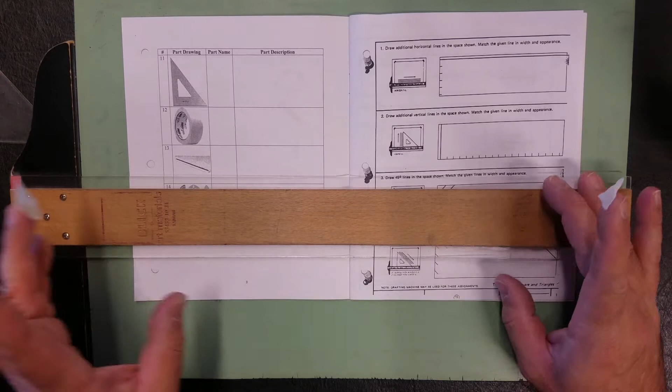Next thing I'm going to do is take my T-square, set it on top of my paper, and use one of these lines right here as my reference. It doesn't matter if you use the top or the bottom of your T-square - the only thing that matters is that you've got your edge nice and tight.

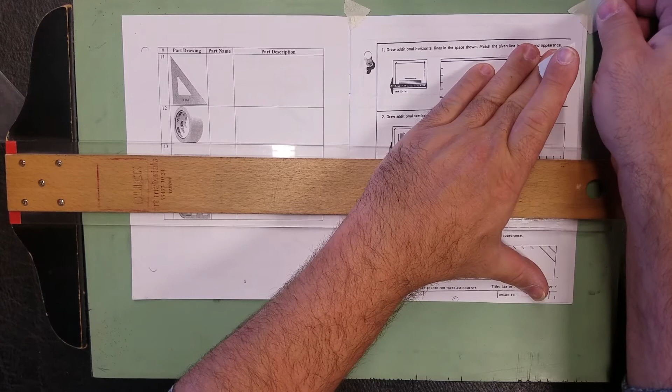Once you have it, go ahead and put a piece of tape right here in the corner. I'm going to put another piece in the corner. Push my paper over and down, and over and down.

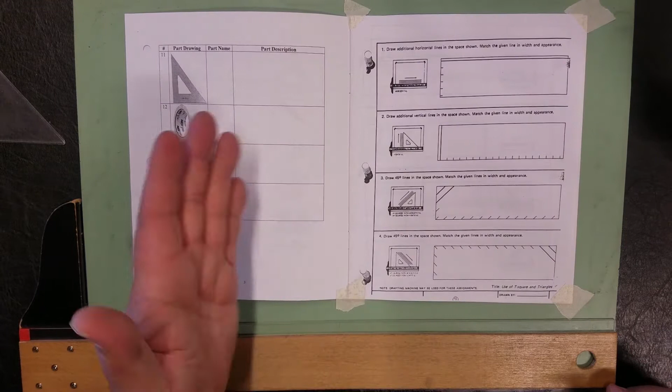Now, if you had a paper where you needed to draw on both sides, don't trust that this paper is square to this paper - they're photocopies, there's nothing I can do. So you're going to have to square it each time. So consider this piece one individual piece of paper, and consider this to be one individual piece. Notice it's flopping in the wind.

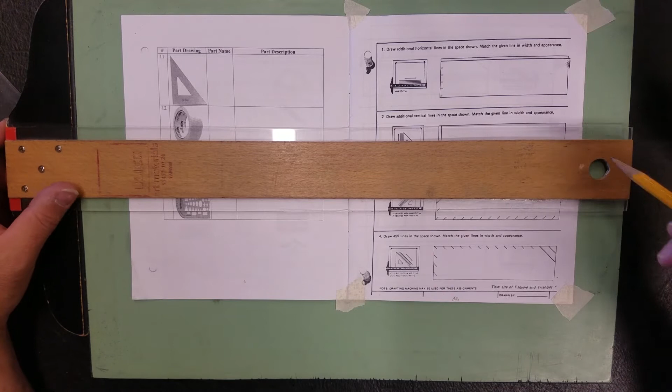I don't care. You can then go ahead and start working on this assignment. First thing you're going to do is take pencil, set it on the line, bring your T-square up to that, and draw your line from point to point.

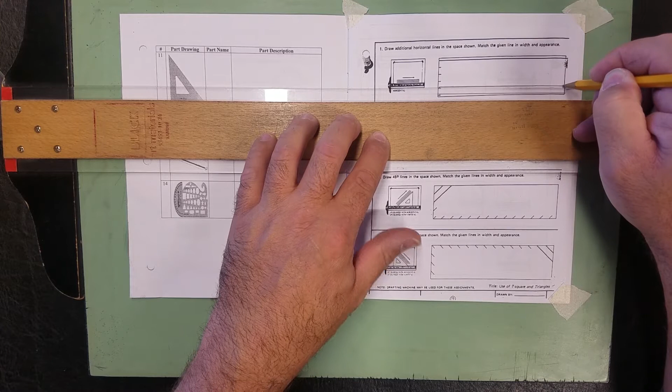Come in here again, set it on there, bring your T-square up, make sure your T-square is tight against the edge, draw your line across, and continue on. If you want to try to get a little fancy when you have your pencil sharp, try putting a little twist when you're drawing your line - it'll give you a sharper line.

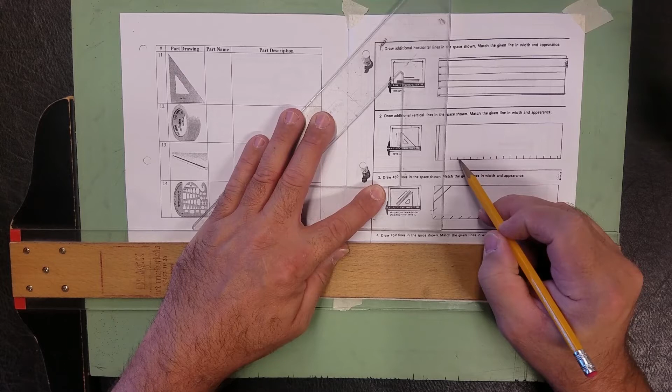All right, next one is asking you to use a combination of 2 tools. So again, set it on there. You're going to have to use pressure downward on the paper and T-square, and so on, and you'd complete that.

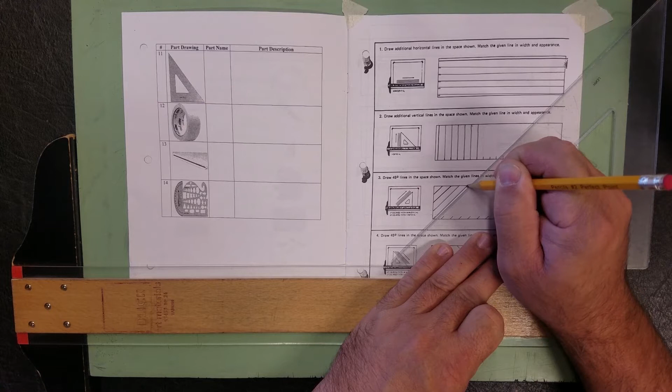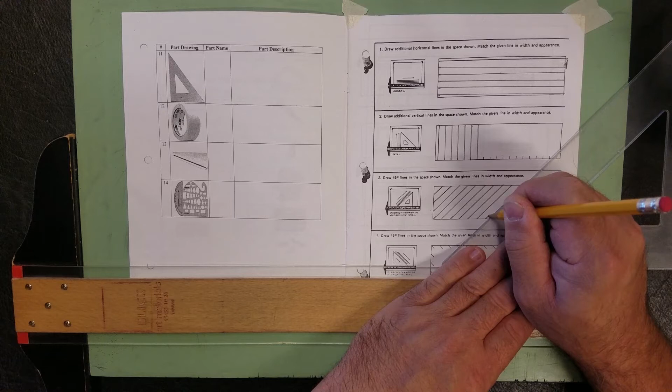All right, so next thing we're going to do is work on the 45-degree angles here using the 45-degree tool that I have here. So again, set your pencil on here and go ahead and draw your line, and so on and so forth.

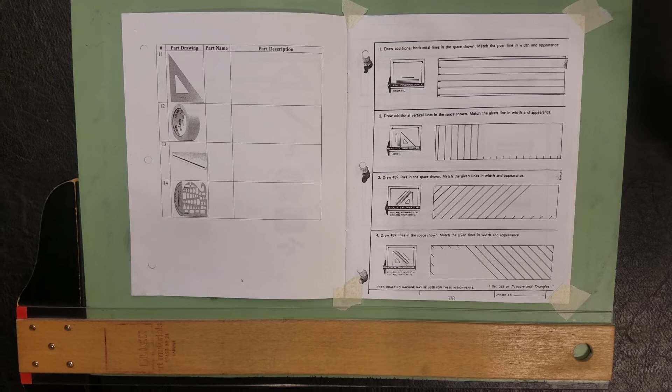Next, we're going to draw 45-degree lines. Again, notice this time before it was showing that we draw our lines up - this time it wants us to draw our lines down. Same thing again. Try to keep your lines inside the box, and then obviously you're going to complete all of these lines - I'm just doing this as a reference for you.

Lastly, what you are going to do is go ahead and put your name - best technical script that you possibly can. Last name, comma, first initial.

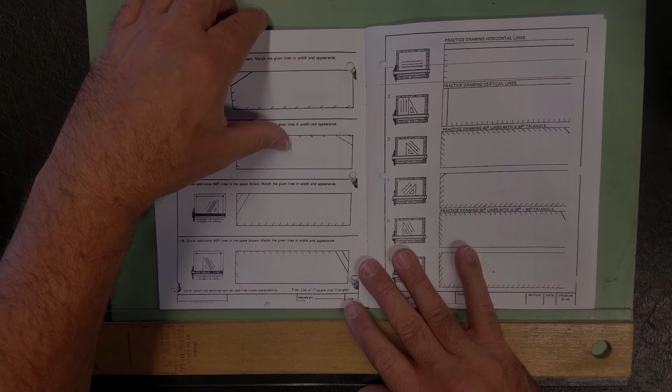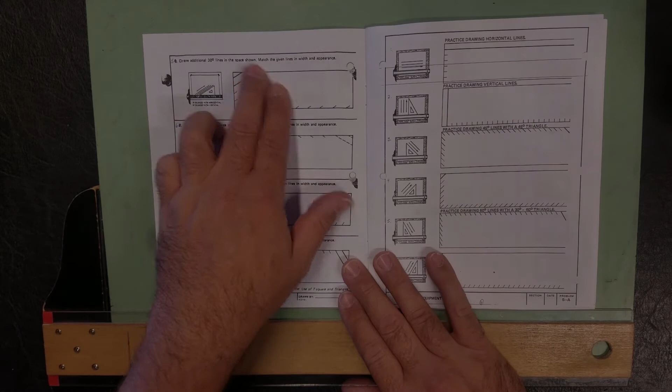What we're going to do in this assignment is very similar to our previous assignment on page 4, where we were setting up for drawing our lines. This time we're going to be using our 30/60 triangle and our T-square in order to create our lines.

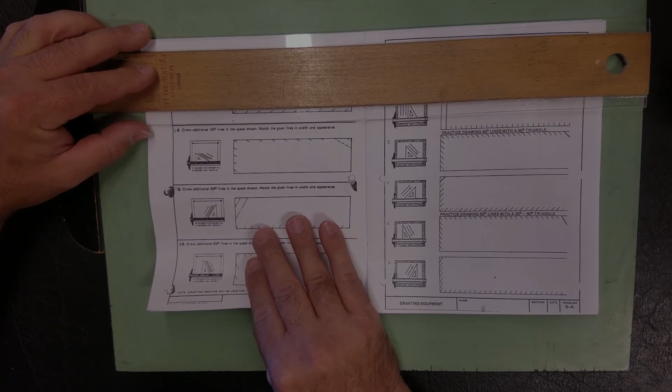First thing you're going to do is line up your booklet. Now remember, our booklet is only going to be used one side at a time - meaning if I'm working on the left-hand side of my booklet, I'm going to tape down my left-hand side. If I'm working on the right-hand side, I'm only going to tape down the right-hand side. So I've got that squared up.

I've got my 4 pieces of tape ready here - remember to de-sticky them by simply sticking them on a piece of clothing a couple times. If you don't de-sticky them, you take a very good chance of ripping your paper.

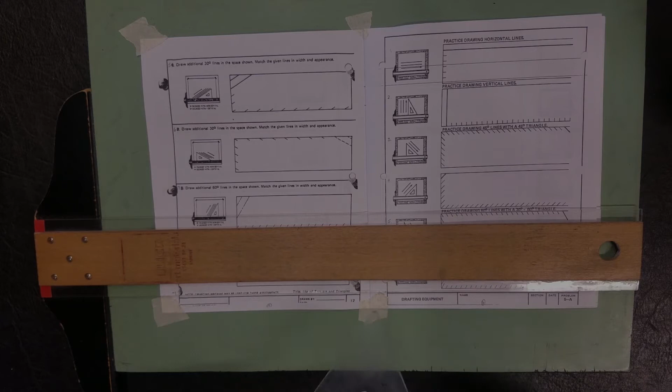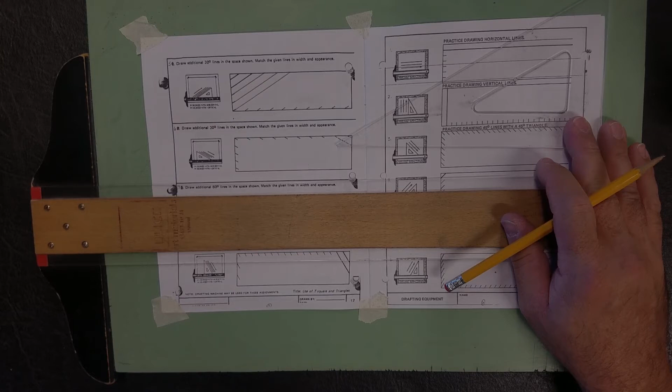All right, so now this time I'm going to need my 30/60 triangle. You'll notice that the orientation of my triangle is the same orientation as here. I'm just going to come in here, set my pencil on the mark, and draw my angle. I would continue doing that throughout all these marks here.

Next thing I'm going to do is what they want me to do: draw additional 30-degree lines, matching the given line width and appearance. Notice this time what they want us to do is create something called a hidden line, or a broken line. So this time I'm going to simply come in here, make sure my T-square is nice and tight.

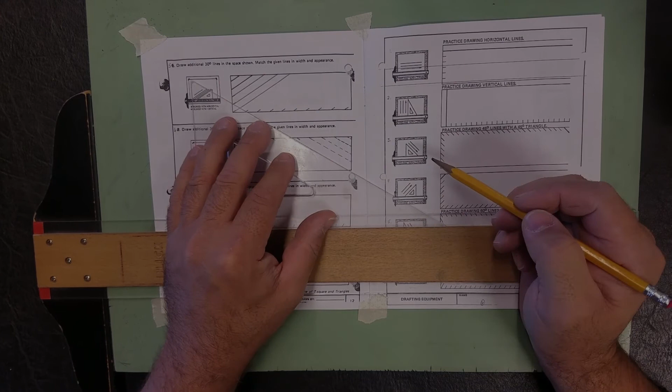And I'm just going to try to mimic what they are doing. If you're not exactly the same, that's okay - we're only just learning how to do this. And you'd continue on with that. You'll notice now I'm switching to another style line - this was a hidden line, and this is now what we call a center line.

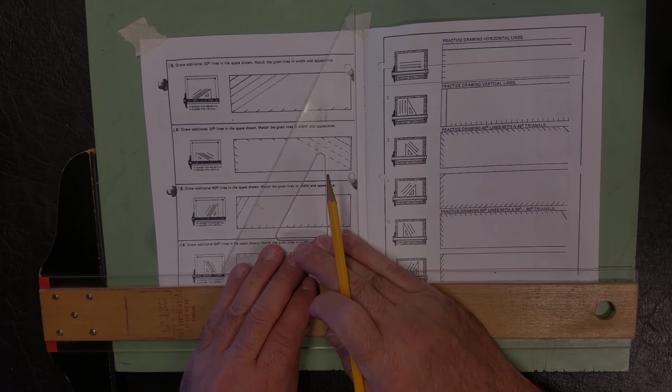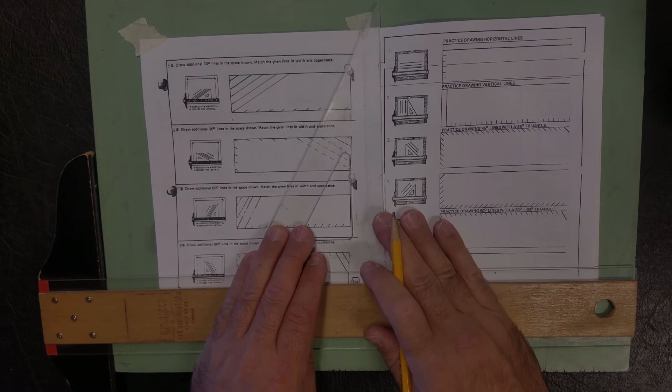So we're going to switch the orientation of our triangle, and now we're going to create 60-degree lines. It's a long line, space, short line, space, long line. Long line, space, short line, space, long line. I'll do that a couple more times for you: long line, space, short line, short space, long line. Okay, continue on with that going across.

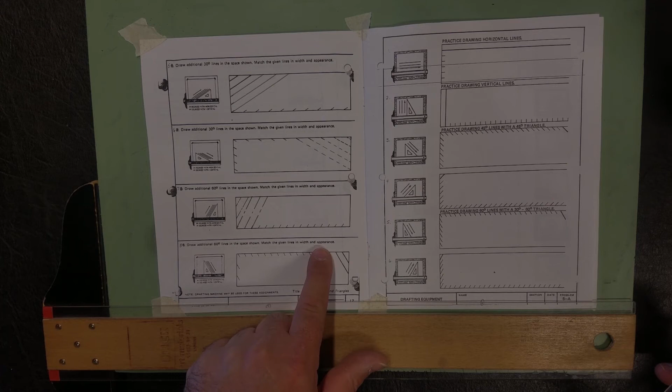Next, they would like us to draw a 60-degree line just matching the width and appearance. So again, it's a solid line. Make sure that we've got this on here, line up our mark, and project down.

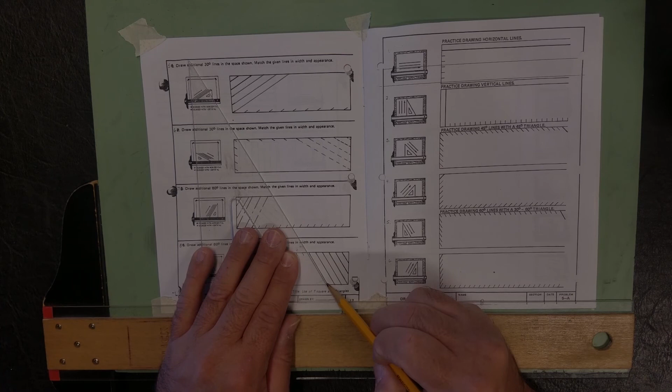You are using your tools in combination with each other, okay? Now that's it for this piece here. You're going to go ahead and put your name in here again. If you need to change your board angle, you can - change your body angle, whatever you've got to do. Best technical script.